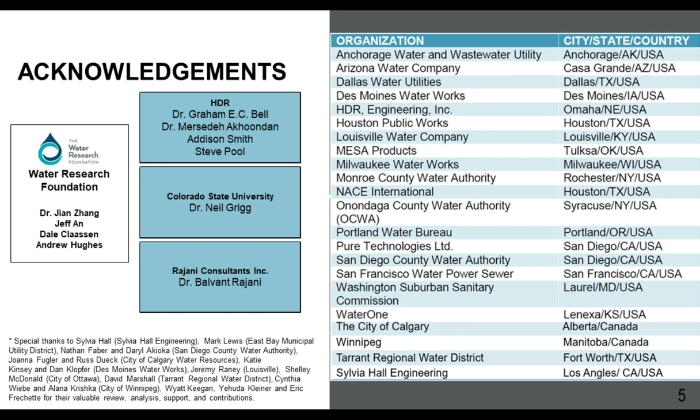Balvant Rajani from Rajani Consultants would help bring in the Canadian experience, because in many ways the Canadian utilities are further ahead on the application of cathodic protection to extend the life of metallic pipes in the ground. Overseeing the whole thing is Jian Zhang from the Research Foundation as PM, along with input from the Project Advisory Committee—Jeff An, Dale Claassen, and Andrew Hughes—who gave us more of that utility influence.

So it's a very practical project with a lot of moving parts, and I hope you find these as valuable as many of the participants did. In the upper right-hand corner, you'll see a reference to the chapters of the report. When they're highlighted in green, that means that's what we are talking about. Just keep that in mind as we go through.

One of the findings we like to bring out is, overall, what's the motivation for this project—and that is really that external corrosion of water mains is a very expensive proposition. When you look at it from the total societal cost, it's about 3.4% of the GDP of a country overall, and when you look at drinking water and sewer systems specifically, it's about $36 billion.

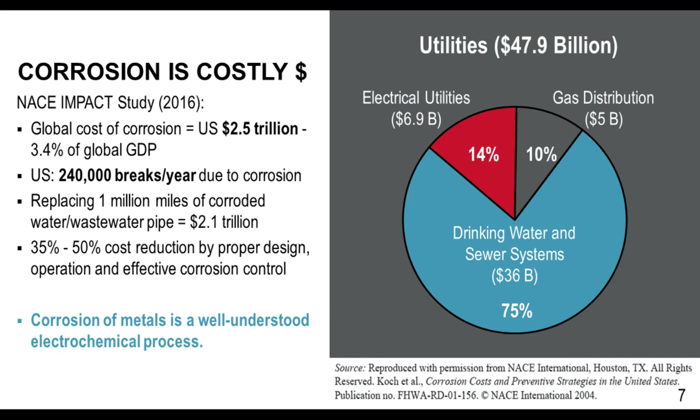So it's a very large problem, and this was addressed in one of the earlier reports I was involved with, back when it was called American Water Works Association Research Foundation, before it changed its name to Water Research Foundation. Still a very valuable report that first gave some of the foundational information for this particular project.

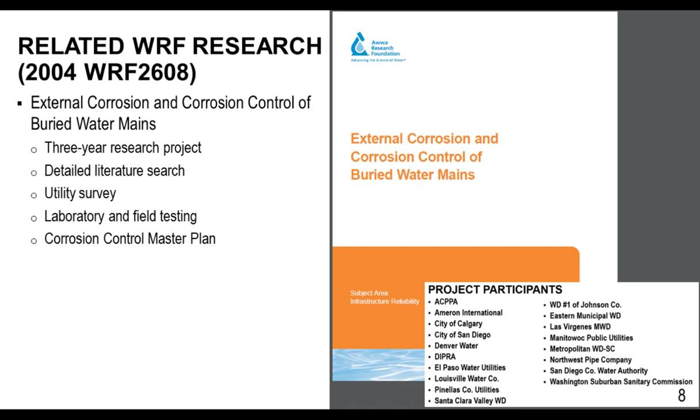It was a 3-year project with a very detailed literature survey. We did a utility survey, laboratory testing, and developed what we refer to as the corrosion control master plan, which gives you an outline of how to implement a corrosion control program if you want to get started. This particular project report was the foundation, and you'll see in a few minutes how it really showed up.

That was project 2608, published about 14 years ago, back in 2004. What we found even then was that even though cathodic protection has been known since basically 1831 as a way to prevent corrosion, and it's used extensively in the oil and gas industry, it really hasn't caught on that much in the water utility industry. That question was why, and we have some reasons we'll talk about here.

We also recognize that the water utility industry has a unique perspective on corrosion and corrosion control, because there's no regulatory requirement. In the oil and gas industry, if people don't apply cathodic protection or improperly apply it, somebody will go to jail.

The other thing about the water utility industry is that in oil and gas, you only have one pipe material—steel pipe with fusion bonded epoxy. But in the water industry, we have concrete pipe, pre-stressed pipe, steel pipe, cast iron, ductile iron. So that changes how you approach corrosion control and the application of cathodic protection.

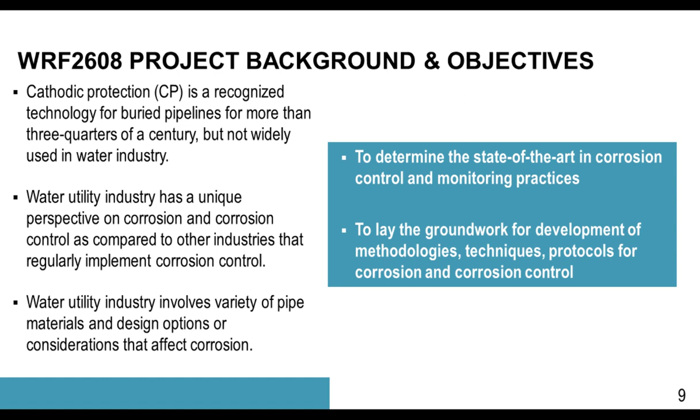The reason we're talking about this 2608 report is that one of the main participants we spent a lot of time with, and got a lot of good information from, was Louisville Water Company. There was a gentleman there who was very interested in understanding the data and information about pipe leaks, pipe breaks, etc.

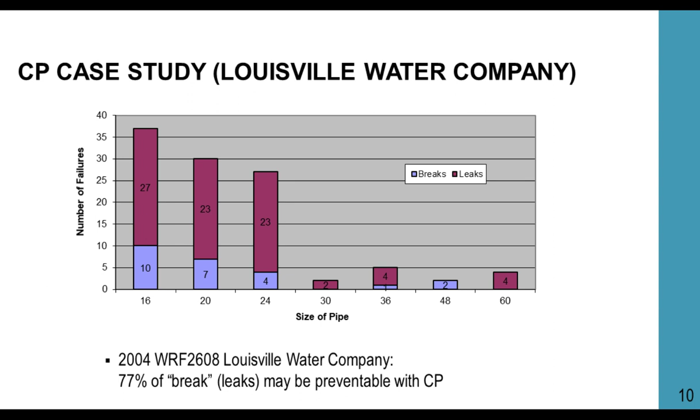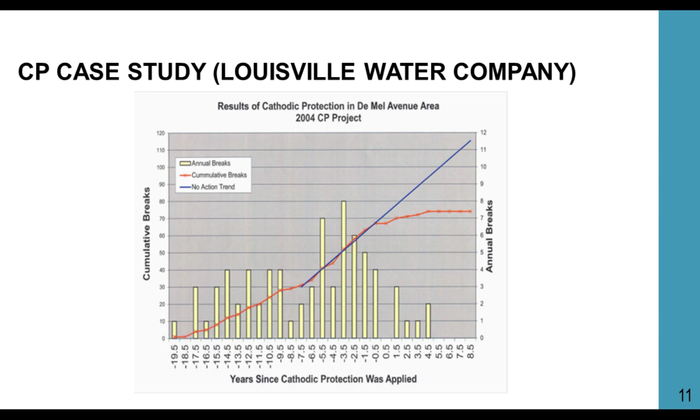If they hadn't installed the cathodic protection, they would have followed that blue line going up, having more and more leaks, more and more unpreventable. So it showed in this particular area that cathodic protection worked, but the real point was that it took them almost 4 to 5 years before they were able to see the value of implementing it. Their persistence and patience in the application and tracking of the data really helped them understand what was going on within their system.

That was all part of this 2608 project, and that last graph I showed, I actually came across in 2014, so it was relatively new, but it showed that what we've been talking about in 2608 was on the mark. So there are really 4 outcomes from 2608, and eventually this new project we're going to talk about as part of it: you have to pay attention, assess the condition of your pipe, understand the data, track the data, in order to give yourself the information you need to go forward and improve the situation you're in.

If you ignore it, it doesn't do any good. If you ignore it, the problem only gets worse. That's a result of the second law of thermodynamics. You have to take action, you have to just go out and do it. I know we stole that line from the folks at Nike, but the problem is people don't know where to start. The advantage with cathodic protection in particular is you can't do any harm with it. It's very hard, particularly with galvanic, to do any harm, but you just got to go out and do things. You also have to commit to a future, because it's going to take a few years for what you're doing to really show up.

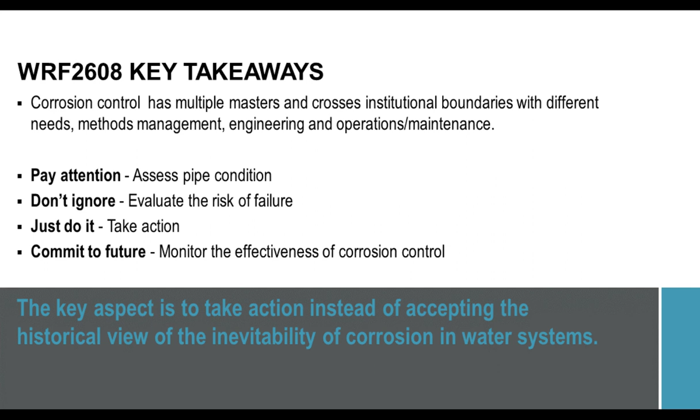So with that, I'm going to turn the presentation over to Mersedeh, let her talk about what was 4618, this new project that took forward those concepts that we developed in 2608. Without further ado, I'll turn it over to her to explain what we did in 4618. Mersedeh, it's all yours.

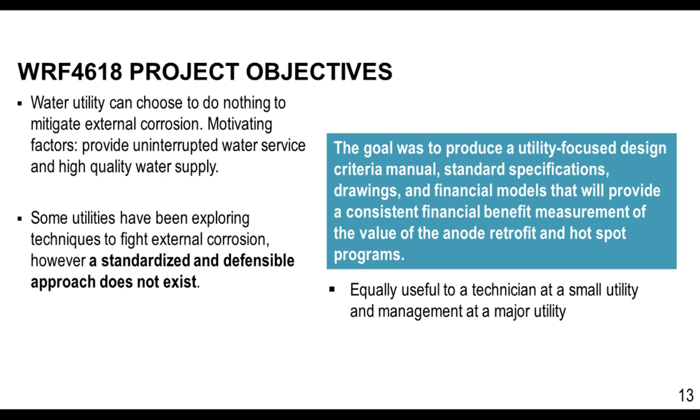As you may know, water utilities can choose to do nothing to mitigate external corrosion, but motivating factors are typically to provide uninterrupted water service and high-quality water supply to customers. Some utilities have been exploring techniques to fight external corrosion, but a standard and defensible approach does not exist. Therefore, the goal of this project was to produce a utility-focused design criteria, standard specification, drawings, and financial models that illustrate the benefits of anode retrofit and hot spotting programs. We are hoping that this manual is equally useful to a technician at a small utility and management at a major utility.

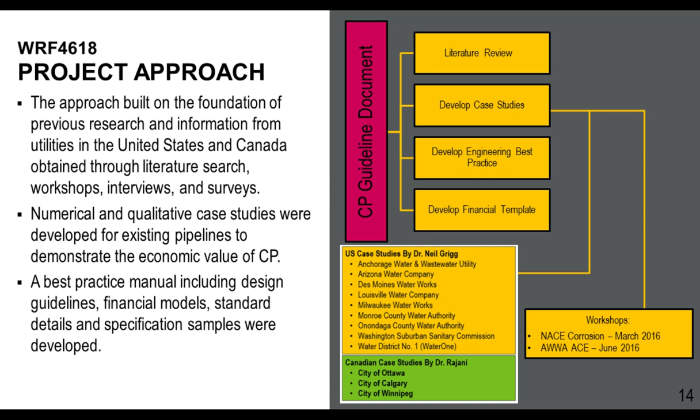So, Water Research Foundation 4618 project approach. As Dr. Bell mentioned, our approach was built on the foundation of previous research and the information that we gathered from utilities in the United States and Canada. On the right side, you see the U.S. case studies gathered by Dr. Neil Grigg from Colorado State University, and also the Canadian case study gathered by Dr. Rajani. Along with literature review and case studies, we also conducted 2 workshops that I'm going to go over. Based on the information we gathered from these utilities and workshops, we developed engineering best practices and financial templates that we're going to discuss next.

So, literature review. A quick interesting thing about the literature search we did for this project was that there are many, many online publications and resources out there specifically for corrosion protection of pipelines. But when we look closely, only 1% of those online publications are regarding cathodic protection of water pipelines. So therefore, because of this limited available online resources, it was very important to conduct workshops, case studies, and surveys.

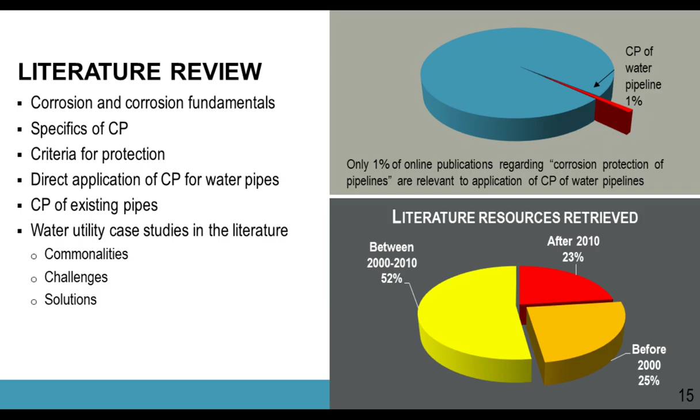As part of this project, we conducted 2 workshops. The first workshop was at NACE Corrosion Annual Conference 2016 in Vancouver, Canada, and our audience were mainly corrosion professionals. The second workshop was at AWWA ACE 2016 in Chicago, and our audience were mainly water professionals. The objectives of this workshop was to provide notification of the project, discuss the benefits and challenges of cathodic protection specifically on water systems, present and gather case studies, and more importantly, to collect information and professional perspectives.

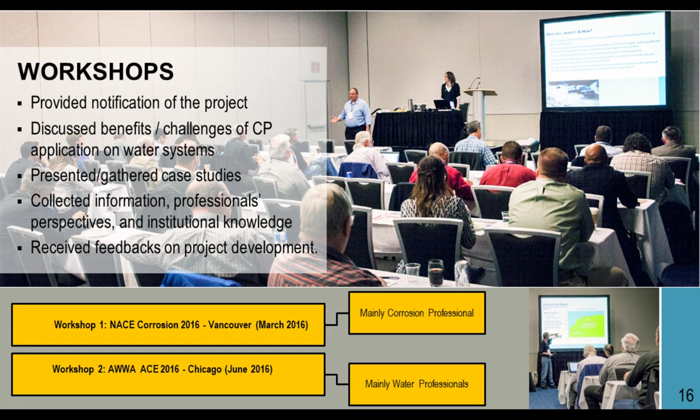During this workshop, we noticed a very important difference in perspectives. When talking to corrosion engineers, they all thought that cathodic protection always worked, the cost can always be justified, and then they would get into the detail of design parameters, monitoring, and protection criteria. We understood that the corrosion engineer's job is just to stop corrosion, and they're 100% committed to corrosion control. But when we were talking to water professionals and water utilities, there were so many uncertainties about cathodic protection, and so many questions.

They were unclear if cathodic protection will work on their system, how long and how much money has to be spent to see the effect, how to justify the cost and budget for it, where to start, is it going to be simple enough to incorporate through routine operations, how to maintain it, who's going to be in charge of it, and what to do with the collected data. So we understood that the water utility's job is to deliver water, and corrosion is among many other things they have to worry about.

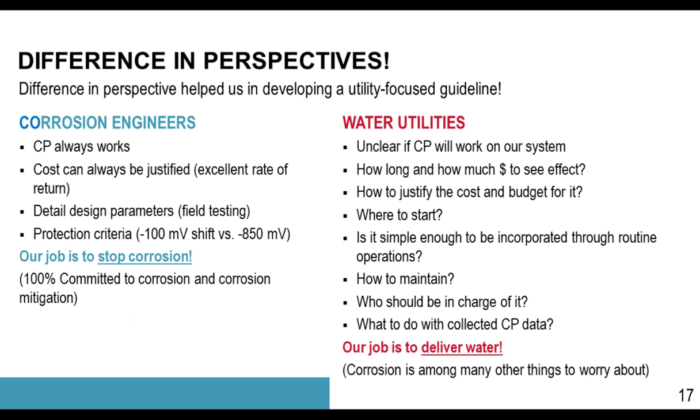This difference in perspective was very important because it helped us to shape our manual and make it more utility friendly and more utility focused.

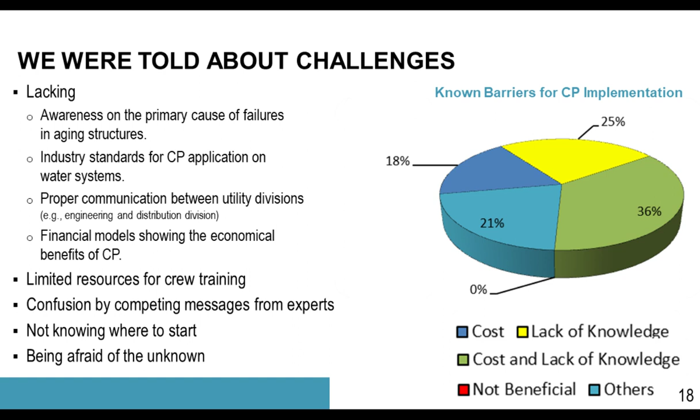During the surveys and workshops, we were told about major challenges in implementation of cathodic protection for water pipelines. The main challenges included the lack of awareness on primary causes of failures in aging structures, the lack of industry standards for CP application on water systems, lack of proper communication between utility divisions—for example, engineering and distribution division—lack of financial models showing the benefit of CP, and many utilities dealing with limited resources for crew training. There was some confusion from competing messages by experts, not knowing where to start, and being afraid of unknowns were main challenges we were told of.

So the conclusion from all these qualitative case studies, workshops, and surveys was that no one size fits all exists for cathodic protection for water lines. With the variety in pipe characteristics, soils and environment, and other risk factors, there should be customized approaches when you want to launch your CP for your utility.

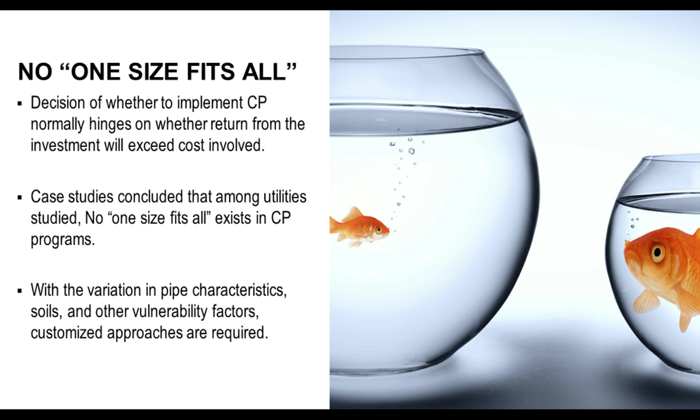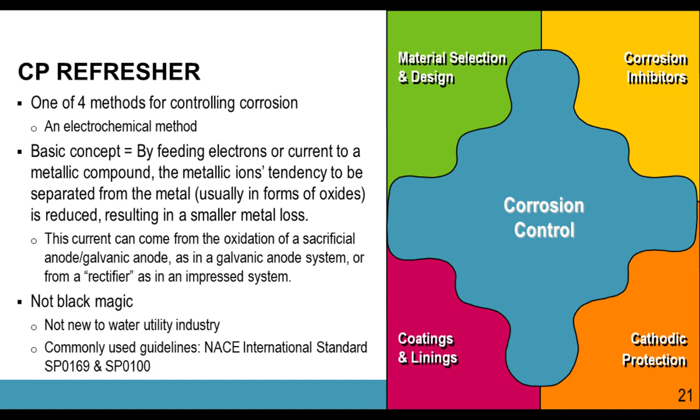It is not black magic, and it's not new to water utilities. It's been around for a long time. There are commonly used guidelines, such as NACE International Standards, that talk about the design parameters and criteria for cathodic protection.

So with that, what is anode hot spotting? Anode hot spotting refers to the opportunistic installation of cathodic protection anodes at the breakage repair. So basically what we are asking is that you install an anode every time you excavate for a routine repair. We ask your crew to have the anodes in the back of their truck, and as they're excavating to conduct their repairs, they install the anode at the same time.

The procedure is easy and relatively quick. It's not labor intensive, and the cost is insignificant compared to the cost of excavation. Typically, an anode costs about $200, and an average cost of an excavation is about $5,000. So it's insignificant cost. All we are asking is that—there's no monitoring involved—you install the anode and can forget about it, but you want to keep record of the location, just in case in the future you want to go back and use a more sophisticated cathodic protection system. In that case, you would like to know the location of existing anodes.

So anode hot spotting is going to delay the future break, and it stabilizes the overall rate of break. We expect that in a relatively short time you would see a stabilization of the overall break rate, but it may take longer to see a reduction with hot spotting. On the right side, you see anode installation using cad welding on a pipe as part of a routine repair.

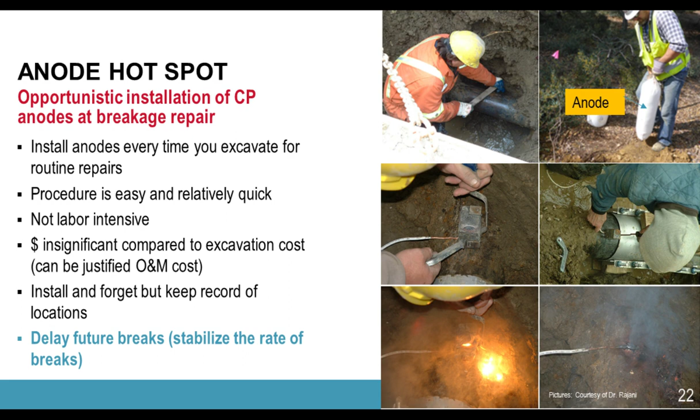So the next slide is about anode retrofit. What is anode retrofit? Basically, anode retrofit refers to systematic installation of anodes at each pipe segment. It can be done in two ways: either install an anode on each pipe segment using keyhole techniques, or excavate every other joint, bond the joint, and install the anode.

On the right side, unfortunately I don't have a pointer to show, but on top it shows the anode retrofit, and on the bottom it shows the traditional cathodic protection. For traditional cathodic protection, you have to make sure every segment of pipe is electrically bonded and continuous. However, in anode retrofit, you can only excavate every other joint, bond them, and install the anode.

It will require some labor, training, and resources, and requires maintenance for long-time effectiveness. So the cost is, of course, more expensive than hot spotting, and can typically be justified as a capital improvement project cost. Anode retrofit will stop the breaks and reduce the overall rate of breaks. It will take some time to see the full effect, but it's going to be effective long term. As you see on the picture, at the bottom, you see some keyholing being done and the excavation for this anode retrofit.

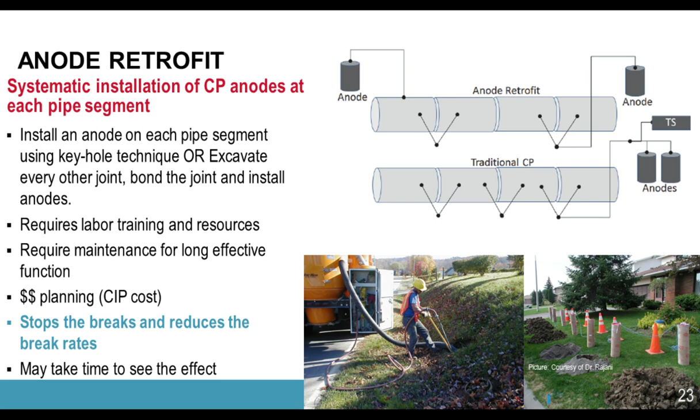As part of our report, we provided sample specifications and sample drawings for anode installation. For example, in this slide, you will see the two common methods of installing anode wire to the pipe: using pin brazing and cad welding. These procedures are relatively simple to apply and require minimum training.

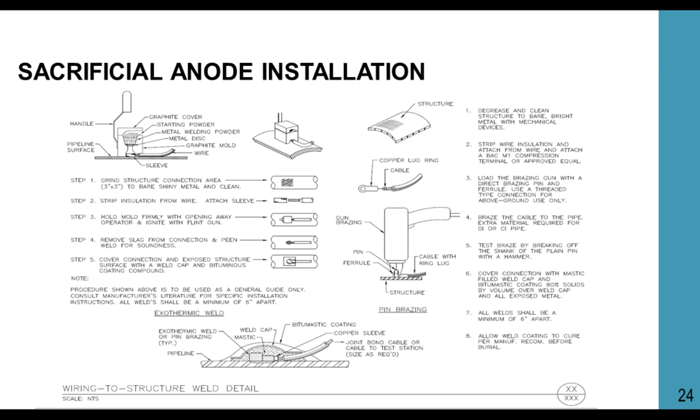So now let's discuss pros and cons of hot spotting, which seems like a no-brainer. Hot spotting is just a small increase in maintenance cost. As I discussed, the cost of an anode is only about $200 or so, and it can be utilized on electrically discontinuous pipe. As you know, the main concern with water pipelines is electrical continuity, and hot spotting can definitely be applied on electrically discontinuous pipe.

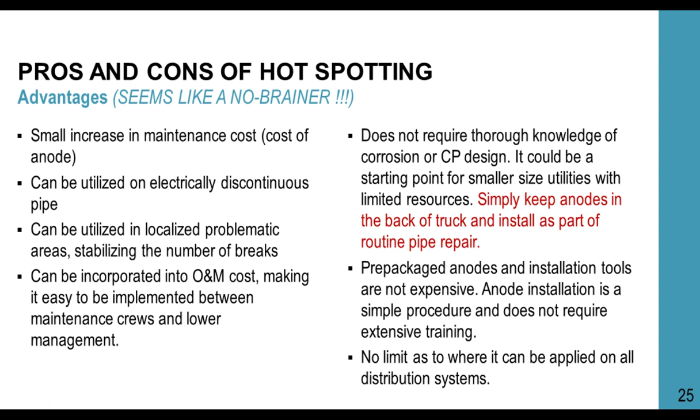It can be utilized in localized problematic areas, and it will stabilize the number of breaks. It can be incorporated into an O&M cost, making it easy to implement between the maintenance crew and lower management. It does not require thorough knowledge of corrosion or CP design. It could be a good starting point for smaller size utilities with limited resources. Simply, as I said, keep the anode in the back of the truck and install it as part of the routine pipe repair. Prepackaged anodes and installation tools are not expensive, and anode installation is a simple procedure that does not require extensive training. There is no limit as to where it can be applied.

Let's talk about some items that can be considered disadvantages of hot spotting. Of course, when you compare hot spotting with a full-scale cathodic protection, the economic analysis may give the method undue advantage, assuming a higher level of CP effectiveness. It may take 6 to 10 years of transition period to show a significant breakage reduction.

As I mentioned earlier, the purpose of hot spotting is to stabilize the overall break rate, but it may take longer to see a significant breakage reduction. A long transition period may lead to abandoning the program. Bulk purchases of anodes might be beneficial, but storage and damage could increase the cost of the anode. One more important thing: when you do minimal engineering and planning, you shouldn't expect a perfect result. It may not result in perfect protection, and the protection may not be as effective or long-lasting as a fully designed system. However, hot spotting will provide some protection even for a short time in almost all cases.

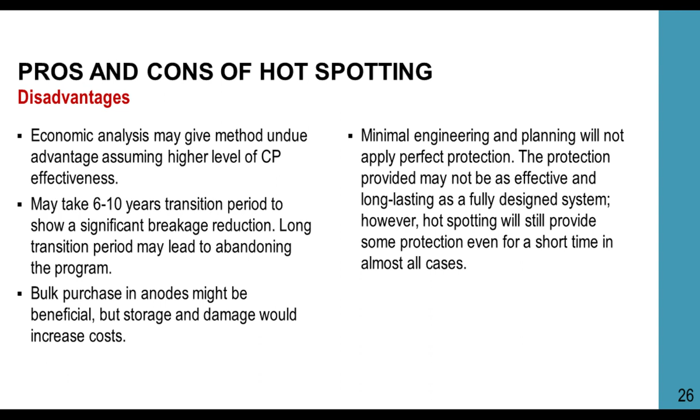Now that we've talked about hot spotting and anode retrofit, let's discuss the direct application of cathodic protection for water pipelines. For new installation, we certainly recommend that water utilities refer back to the Water Research Foundation 2608 that Dr. Bell discussed earlier. For those new installations, we certainly recommend that it should be fully designed, the pipeline should be fully electrically continuous, and the monitoring and maintenance system should be installed.

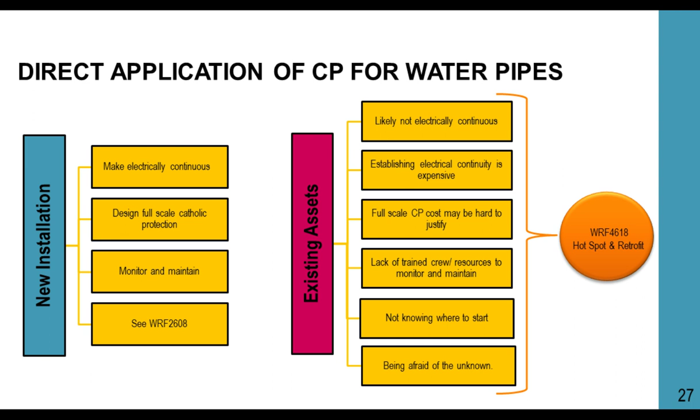However, for existing pipelines, which are likely not electrically continuous and where establishing electrical continuity would be expensive, a full-scale CP cost may be hard to justify, and the utilities may not have the trained crew and resources to monitor and maintain it, and some utilities don't even know where to start. Then we certainly recommend that you consider hot spotting and retrofitting as this project discusses.

With that, we're going to be moving on to the case studies. These are only selected case studies presented here, and you can find more case studies in Chapter 5 and 6 and Chapter 2 of our report, but we only selected a few here for presentation.

The first case study is one of the first that shows the successful application of cathodic protection on water pipelines. This is related to East Bay Municipal Utility District, East Bay MUD, and their Mokelumne Aqueduct that was built in 1928. The aqueduct consists of 93 miles of pipe, 81 miles of it being steel, and 70 miles of it buried in a variety of soils and rocks, very corrosive to non-corrosive. The first cathodic protection system was launched in 1934. The expected life for the pipelines without CP was 70 years.

Actually, this was a very special case study because Mr. Mark Lewis presented this at our workshop, and he was very, very passionate about this project.

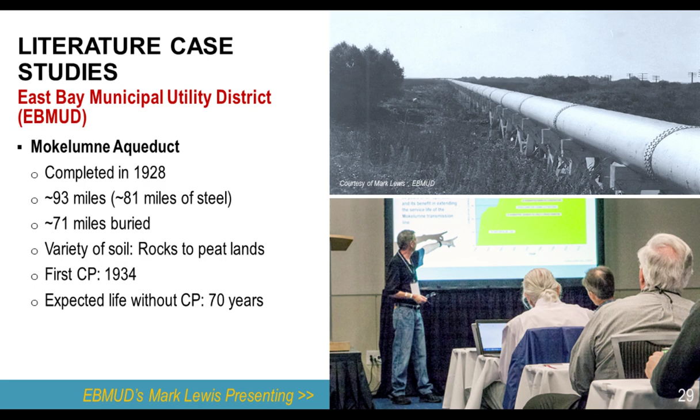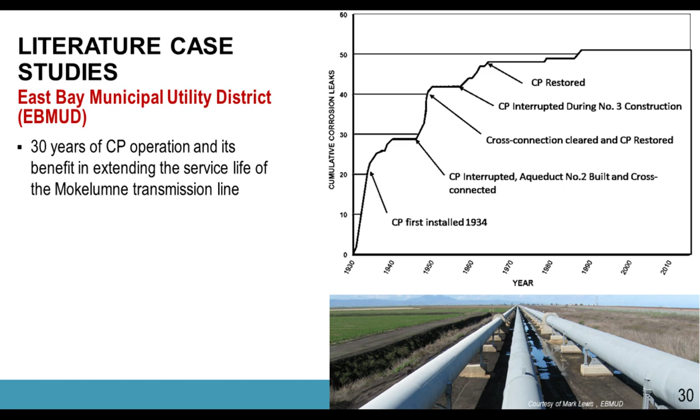Here in this slide on the right, you see a graph that shows the overall breaks and the years for this aqueduct. At the beginning, after installation, they had a sharp increase in number of leaks, and then in 1934 they start applying cathodic protection. Back then, the anodes weren't as efficient as today - they were basically burying a giant piece of steel as anode in the ground. However, after application of even this first type of CP, you see a reduction in breaks and a stabilization in overall breaks. Every time they interrupted their system to build a new addition or cross connection, they had an increasing number of breaks, followed by a slowdown after they restored their CP system. So this is great evidence for 30 years of successful application of CP on their system and extension of the life for this aqueduct.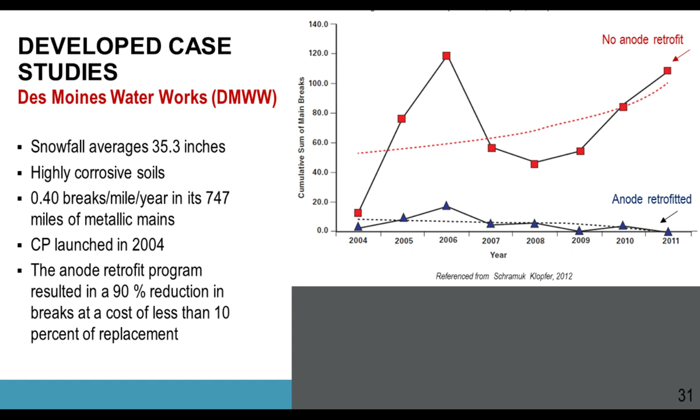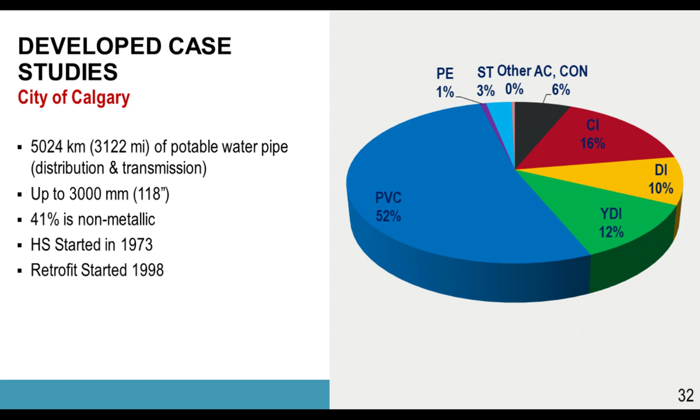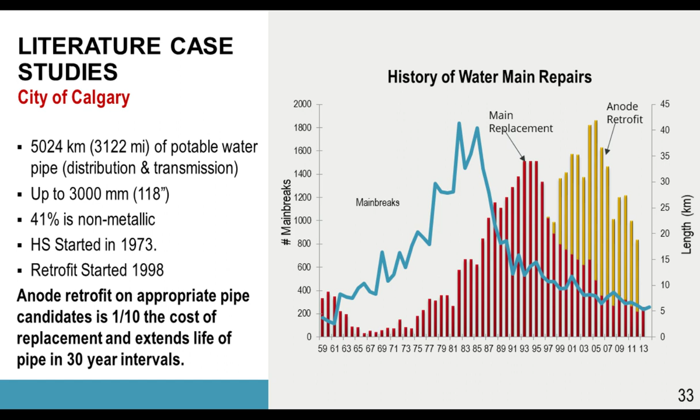If you are interested in these case studies, specifically the Canadian case studies, Dr. Rajani conducted a more comprehensive analysis, statistical analysis, and computational modeling for these case studies, and those are included in the same chapter. I'd like to mention two of these graphs because I think they're a good illustration of the effectiveness of hot spotting and retrofit programs.

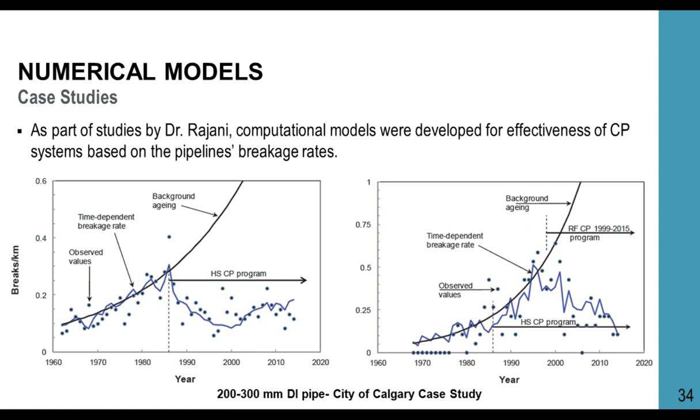With that, we're going to be moving on to the modeling and economics that we conducted for this research. So what is our approach for the numerical and financial models in this report? There were already existing published data showing equations and functions for simplified failure rate projections. We basically took these functions and revised them to incorporate the effect of CP on the reduction of breaks.

We call that the post-retrofit slow aging process. So what is the reason for considering a transition period for CP? The reason is that before installation of cathodic protection, an existing pipe may already be corroded with significant wall loss and imminent breakage. Cathodic protection may delay those breaks but may not completely prevent them. If there's already significant corrosion in some areas, those breaks are going to happen, and cathodic protection cannot undo it, it just happens at a slower rate. Also, as we add anodes and increase coverage, it takes time, and that's also considered in the transition period.

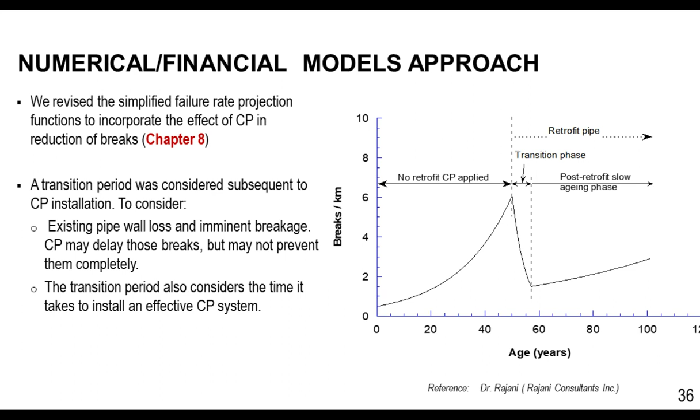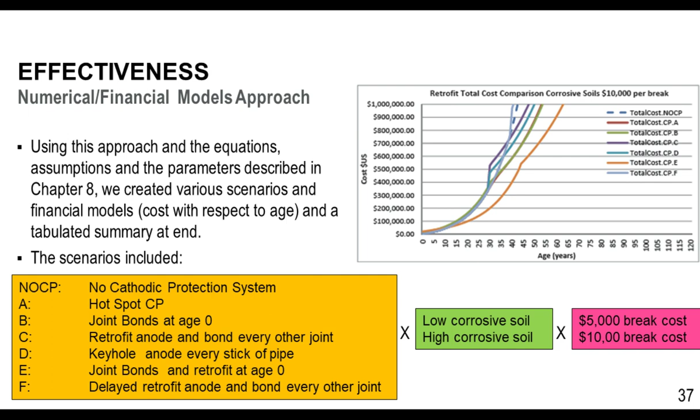Using this approach and the equations, assumptions, and parameters described in Chapter 8, we created various scenarios and financial models, all with charts and tabulated summaries. We hope this is helpful for utilities to look at different scenarios, find a case similar to their system, and use these scenarios to make decisions. The various scenarios considered conditions with retrofit, keyholing, and joint bonding in low corrosive soil versus high corrosive soil, with varying break cost. When we talk about break cost, I typically refer to excavation cost. You see a snapshot of those graphs, and with each graph there's a tabulated summary that goes with it.

So what was the conclusion from our financial models? The financial models showed that hot spotting is a no-brainer. Any type of CP will result in lower cost than pipe replacement. A delayed retrofit has higher cost in corrosive soil, but is still better than replacement. For existing pipe in low corrosivity soil, retrofit at the first sign of increasing failures. More importantly, hot spotting is effective for protection of pipelines smaller than 32 inches and is a good starting point, especially for a small water department with limited resources, as an interim program while a retrofit is being planned.

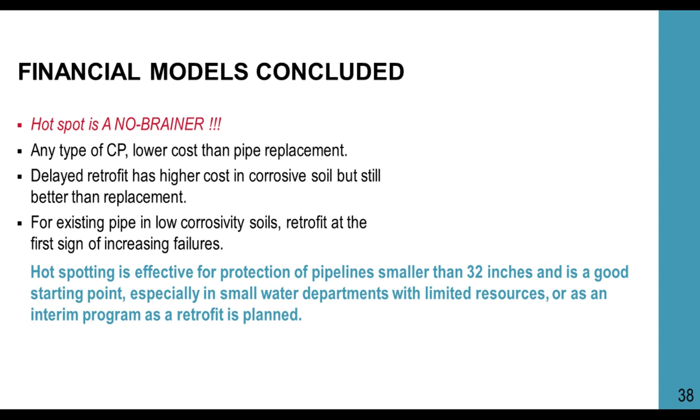Now we get to my favorite part of the report, the best practice manual, which I think would be very useful for utilities. Before we discuss it, if you're among the utilities that currently don't have any cathodic protection program and you're wondering where to start, I'd recommend reviewing Chapter 4. This chapter discusses the utility decision framework for implementation of cathodic protection and opens up different deciding factors such as feasibility, CP program and asset management, designing policies, asset performance CP, and financial CP and monitoring. It opens up these discussions and provides examples for each case from different utilities.

A very important point out of all these factors is that in order to really justify the cost of CP and assess its performance, we certainly recommend that you start collecting data, break data, even before you start your CP program. That will be very helpful in justifying the cost and seeing the effectiveness of the CP.

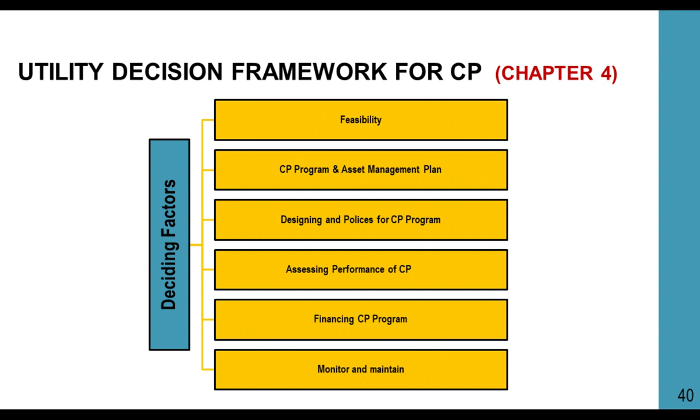For financing a CP program, as we briefly mentioned earlier, for new pipelines the financing should come from the same source that the new pipeline funding comes from. But for anode retrofit, it can typically be justified as capital improvement cost, and for hot spotting, which can be part of routine maintenance, it can come from the O&M cost.

Now we get to the best practice manual, and this best practice manual in Chapter 9 is a guideline, not a roadmap, to assist utilities in developing their own best practice manuals. As a utility, you may decide to increase or decrease the level of complexity. I personally think this guideline is very helpful in discussing with water utility executive managers to consider CP as a cost-saving alternative for maintaining the level of service. The best practice manual also describes the framework for asset management and planning authorities, and it's a value-added program. It's not intended to create large construction, and it's not to be used as a specification for engineering design of CP.

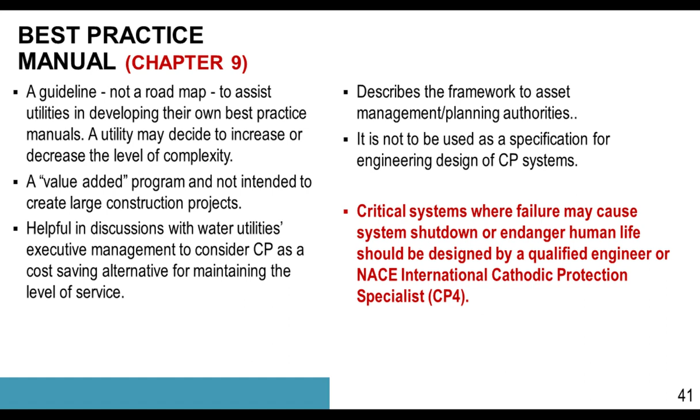When it comes to critical systems, where failures may cause significant damage, shutdown, or endanger human life, we still recommend that you go with expert design. This cathodic protection should be designed by a qualified engineer or a NACE International Cathodic Protection Specialist.

With that, I want to show you a snapshot of the best practice manual in Chapter 9. It's written in a very simplified specification-kind of format that's bulletized and easy to read. It's down to the point, and even if you're not a big fan of writing too much text, at the end of each section we have a boxed green text that highlights the most important items you need to know regarding the CP program and guidelines. I'd certainly recommend you take a look at this—we feel it's very, very utility friendly and it's going to be helpful.

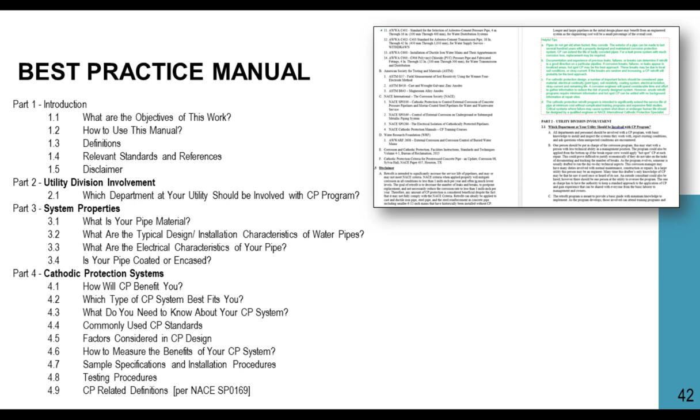So with that, a quick summary of Water Research Foundation 4618.

The key aspect was to take action instead of accepting the historical view of inevitability of corrosion in water systems. Hot spotting is a no-brainer and perfect for any breaks and repairs when corrosion has influenced the failure. Hot spotting is typically effective for protection of pipelines smaller than 32 inches and is a good starting point, especially in a small water department with limited resources, as an interim to the retrofit program being planned. Hot spotting can stabilize the annual breakage rate in a short-term situation and can reduce the overall breakage rate over the long run for pipelines with no CP.

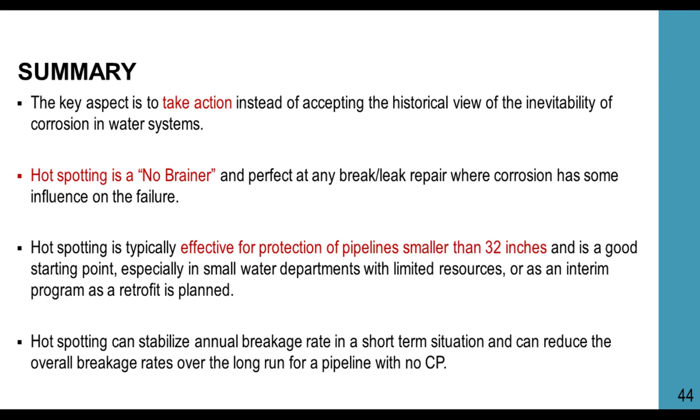Retrofit cathodic protection is the best choice on existing pipe where the joint bonds were not installed at the time of pipe installation, and breakage rates are starting to increase beyond the utility's accepted range. CP retrofit would extend the life and should be installed as soon as the corrosive break patterns are identified.

The best practice manual developed as part of this project provides a framework for a CP retrofit program. The manual is intended to be used as a guideline, not as a roadmap, to assist utilities in developing their own best practice manuals. The case studies conclude that among all the utilities studied, no one-size-fits-all exists in the CP program. With variation in pipe characteristics, materials, soil, environment, and other risk factors, customized approaches are needed.

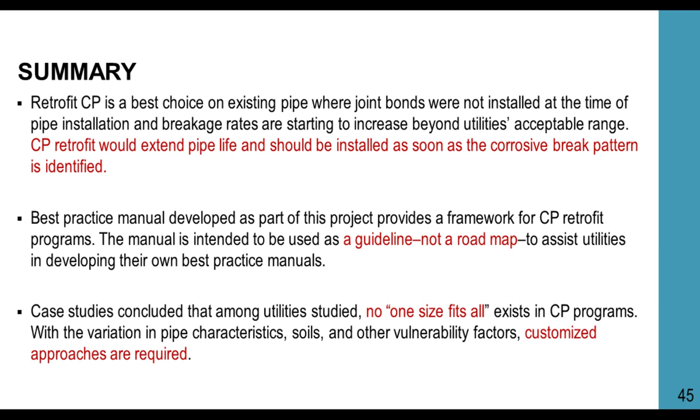Thank you, Mercedes. Now it's Q&A time. We have received many questions. Some people asked where they can get the report or the manual.

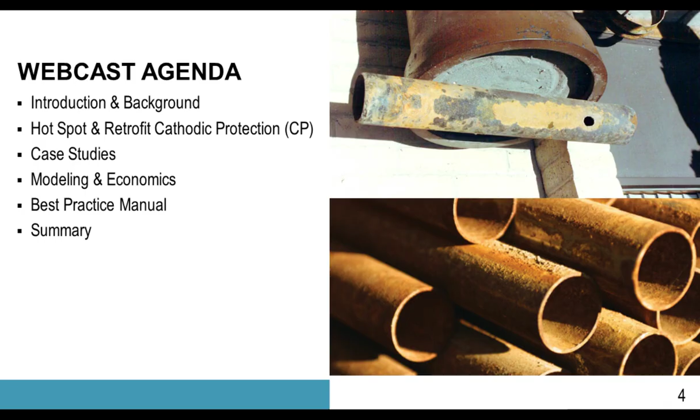The manual is part of the report, so at the beginning of this webcast I showed a link where you guys can download this report and try to use this manual. Let's see the questions here.

So the first question is, did you also check water conditioners with zinc sacrificial anode performance?

No, because we're looking at the outside of the pipe, and water conditioners don't involve the outside of the pipe. This is external corrosion. All right, thank you.

So what are the CP recommendations for new ductile iron pipe installations? Well, this was really addressing existing iron pipe. If you go back to the 2004 project 2608, we talked about ductile iron pipe in great detail, and it's included in the corrosion control master plan.

Things have changed a little bit since then, because now there's the option for zinc coating on the outside of ductile iron pipe. While we think that is certainly valuable, it doesn't replace the need for cathodic protection. In general, we've always had the view that you need to prepare for cathodic protection even if you don't apply it from day one. So for ductile iron pipe, we've always recommended that you bond the joints so you can always add cathodic protection later.